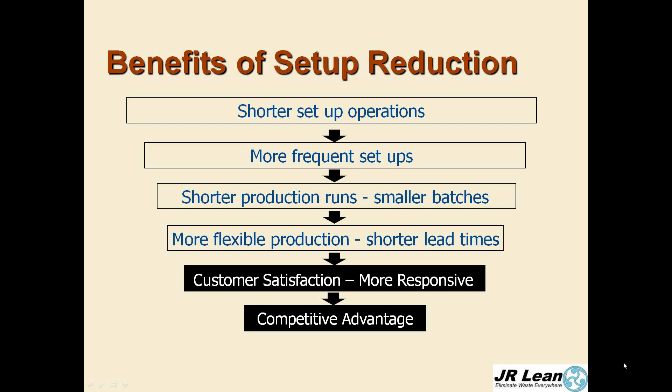So we watched the Formula One race car example, and I believe it was actually around 67 seconds that they took to change the four wheels and add more fuel in 1950. Now, it takes about 2 seconds. Back then, they had 4 assistants helping. And I think that was all they were allowed back then through the competition rules. Right now, 21 assistants.

But the labor is not where the cost is. The cost of your product is actually in how long it takes you to make it through the factory. So the value-added portion is extremely small of the time that it takes to make a product. So it's not labor that really adds cost. So what made the difference? Well, setup reduction or SMED.

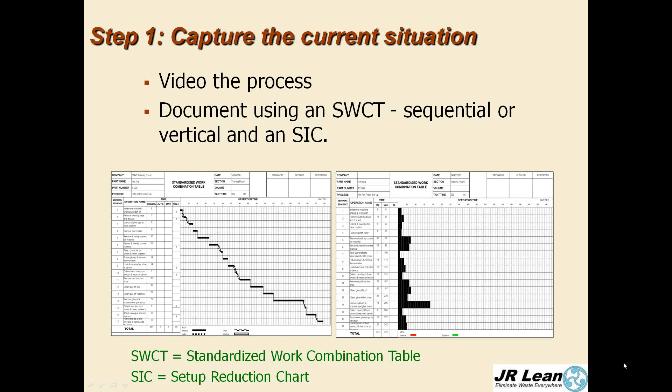And in this particular one, we're using like a Gantt chart methodology to show the elements. And in the other one, we're using a bar chart to show the elements. One actually shows like a Pareto, where's the longest. The other one shows the sequential and the duration. So capture the current situation. That's your first step.

Step two, you have to separate internal and external elements. So for each element, each line item that you have on your standardized work combination table, look at each one of them and agree whether that could be done while the machine is running, which is external, or whether it has to be done when the machine is stopped, which is internal.

So here are your descriptions. Internal, any work element which cannot be carried out safely unless the machine is stopped: tool changing, material alignment, etc. And external, any work element which can be safely carried out while the machine is running: preparation of tools, tool kitting, preparation of gauges, etc.

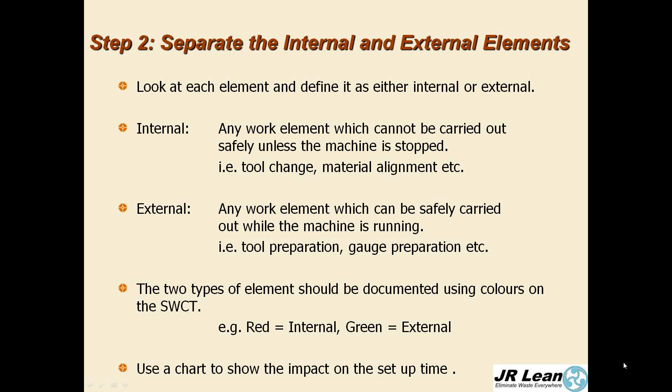The two types of element should be documented using colors. So red for internal and green for external. And then create a chart like we've seen to show the impact on setup time, such as this. So this one in the top left shows that there are quite a number of elements in there that are green that you can actually do while the machine is still running.

So at the bottom, we've just done a simple bar chart that shows the current state 100% stopped. And when we just look at separating internal from external, we see that 35% or 35 minutes out of 100 minutes can be converted to external. And that leaves you only 65 minutes of non-productive time. So this is step two.

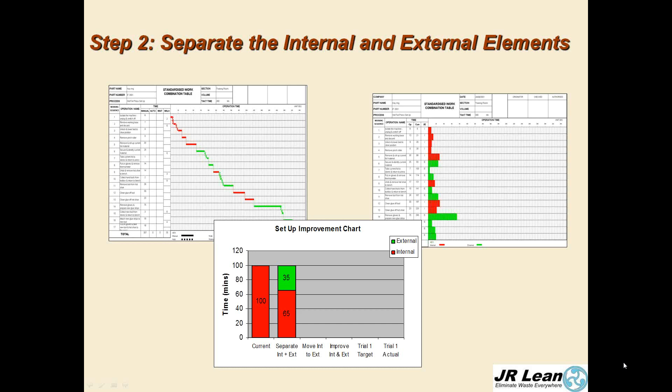Step three now is we want to move internal elements to external. So our focus now is looking at your internal elements and saying, what can we do differently that might make those as potentials for external? So we challenge the process. I've given you some examples here.

Presetting of tools offline. So you might go and purchase an optical presetter, and you can set your length and radius offsets to less than 1/1000th of an inch offline. You can preload the first part of a new batch already into a work holding fixture. You could add machine memory so that if you're running a computer numerical control machine, a CNC, you can actually download the next program while the current one is running.

If you're in a press, for instance, then usually a press has access from two sides, and you can then load the press from both sides. So you can pre-align the next tool that goes in there. And as you can see on the smaller chart over on the right, we took another 10 minutes out of the 65 minutes and converted those to external. So instead of 100 minutes being the changeover time or setup time, we've now only got 55 there.

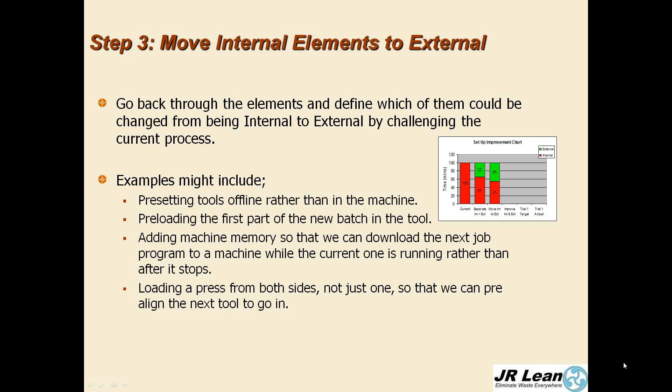Step 4 is to eliminate the waste from internal and external elements, because you really don't want to have waste in external either. Even though you do it while the machine is still running, it is still waste. So carry out a 7 waste exercise. Tim Wood, and all of you remember Tim Wood:

transportation, unnecessary inventory, motion that doesn't add value, waiting, overproduction, producing more or sooner than the customer demands, overprocessing, using the wrong set of tools, systems, or procedures, and defects. So remember Tim Wood, and then carry out that exercise on the setup process.

Obviously, you should focus firstly on internal elements, because they're just a waste of time completely. And some examples: standard pre-change kit lists and kitting trolleys, reduce the need for any hand tools that you might have, integrate into the equipment.

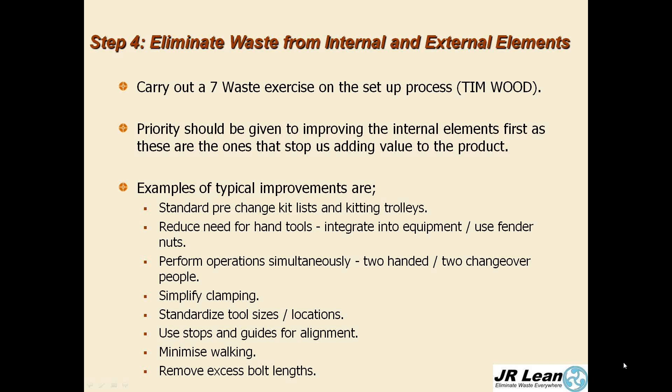So once you've completed the 4 steps, define your trial target. And then create a trial job detail and train the operator or the machinist to use it. So what do I mean by that? You've obviously converted a lot of internal elements to external. And now you've got a new process. You want to trial it to make sure that what you've agreed away from the machine actually will work. And this is the way to do it.

So trial it using the standardized work combination table, and then you can see from the targets what you get. And you can reduce and reduce. Once you've done that, it's really important to standardize your new process, and then to monitor the ongoing setup times.

Unfortunately, people, they're very simplistic. They will respond to what they're being measured on. Currently, if you don't measure changeovers, then they won't focus on making them quicker. If you do measure changeovers, then certainly there'll be a focus on making sure they're done to standard.

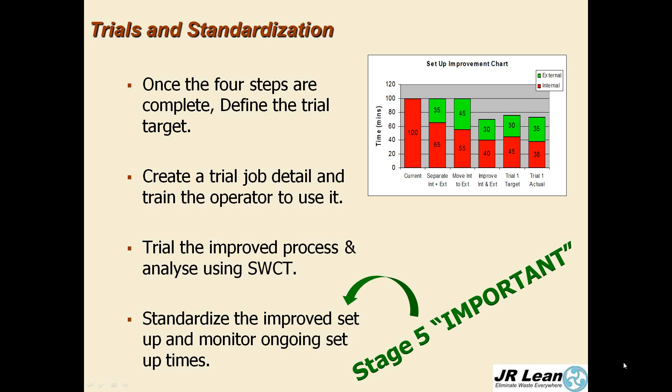And the team leads constantly rotated around the floor, and they could see when the setup started. They'd look at their watch, they could see what it is now. They would ask the machinist, how are you doing? And because the people knew they were being measured and monitored, they focused on reducing those setups really, really well. So it's very, very important to do that.

I'm going to show you a case study now. This is a company in the technology triangle, which is west of Toronto, Kitchener, Cambridge and Waterloo area. It is an automotive stamping company. They're a tier 2 supplier. And they did a value stream mapping exercise and determined that setup was a critical non-value added activity.

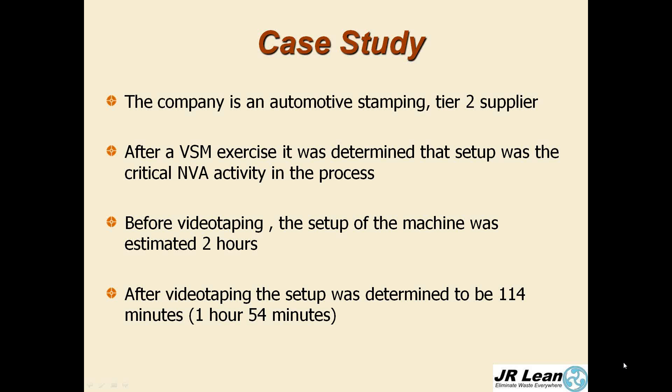Before they videoed the setup, they estimated that the changeover took about 2 hours. And when they finished the video, the setup then was determined to be 114 minutes, so 1 hour and 54 minutes. We did a 4-step process at this company on this machine, and I'm going to show you a video that will show you what the result was afterwards. Okay? Sit back and enjoy.

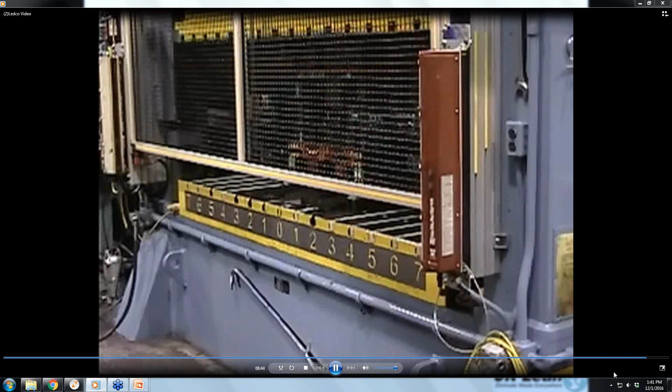So you can see from that video that, in fact, there was a lot of improvement made to that particular job. Previously, it was 114 minutes, and then it was 8+ minutes afterwards. What did the situation look like before we started doing setup reduction on the machine? I've got some images here that will help show what it's like.

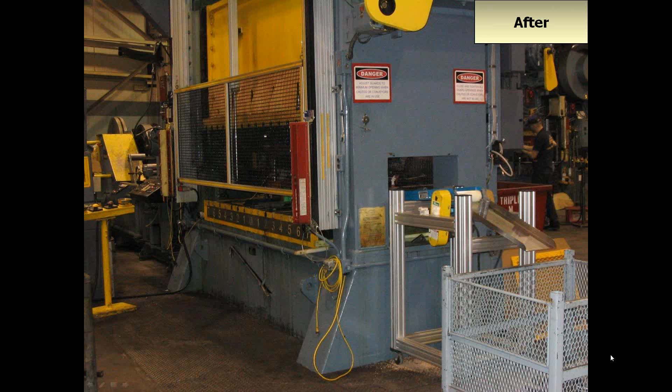Afterwards, they designed a really neat looking conveyor system that was on wheels, makes it mobile, and they could move it out and move it back in. Also, they numbered along the area, they numbered the bottom of the die where the table is, they numbered the slots. So that helped them as well.

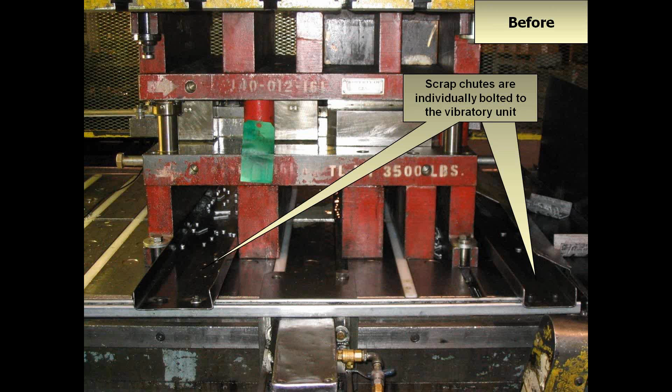Beforehand, they got the chutes that were bolted down to the vibratory unit. You can see the U channel at the bottom that they had, and there were bolts on there, and they had to obviously undo those bolts. And what did they do afterwards? They put a new vibratory unit on.

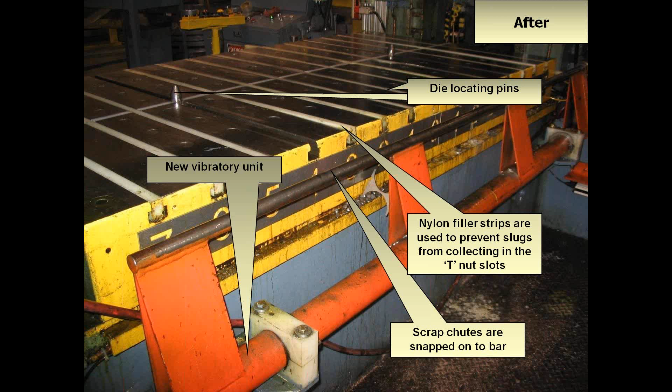They had die locating pins. They put nylon filler strips in the T-nut slots so that the slugs wouldn't go in there. And they had designed it so the scrap chutes could snap right onto the bar, just like that. So there was no bolting and unbolting of them at all.

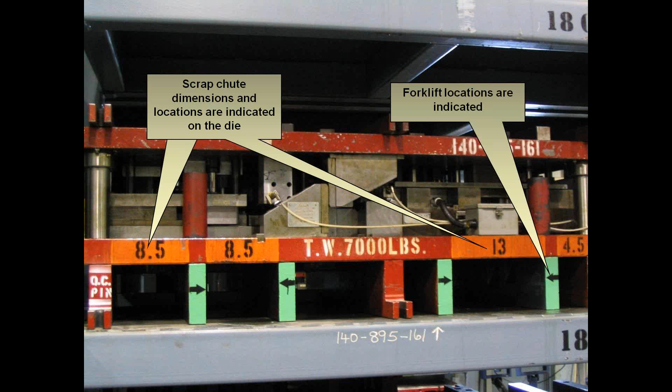They also dimensioned the dies. So these were the dies that they had, and it showed where the chutes went, the sizes. You can see the forklift locations are indicated where the green and the black arrows are, so the forklift driver knows where to pick it up from. And they did a lot of things to basically eliminate waste.

These were the recordings that they did back in November, I believe it was 2004. So it just showed you which shifts were doing which things. Day shift were doing pretty good. Afternoon shift were a little bit less good because they hadn't practiced as much doing the changeover.

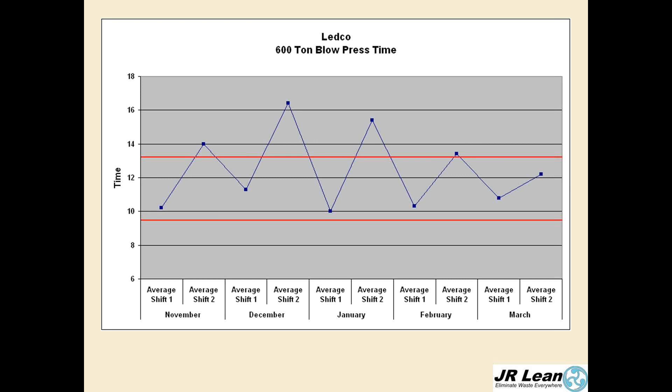These were the average times between shift 1 and shift 2. And as you can see, they got a trend of going pretty well down. So the second shift started to come into play February and March. So between essentially 9 and 13 minutes was their target for a changeover, as opposed to 114 minutes. So a huge, huge gain.

So let's have a poll question. Okay, so here's our poll question that we're going to ask you all. What does SMED stand for? Does it stand for Save My Engineering Department, Senior Management Embraces Dollars, Single Minute Exchange of Die, or September Means Endless Delays? Dave, can you bring up the poll question for the audience, please?

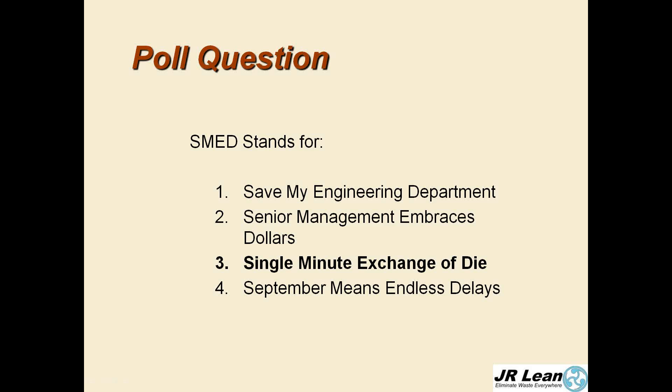Okay, I think everybody's had enough time. Let's see what the results are. Here's the answer, single minute exchange of die. And what did we get for the results? Dave? Can you show the results, please? 100%. Perfect. Excellent. Okay. It was a little bit easy one, but it really sinks into your mind.

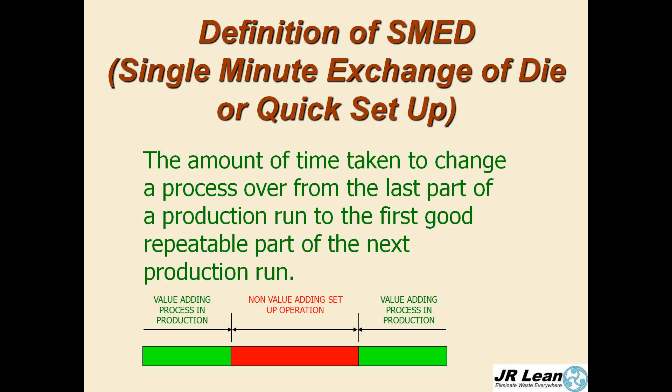So let's have a recap on SMED. What does it mean? Single minute exchange of die. And let's see, can you see my screen again, everyone? I think so, yes. So the amount of time taken to change a process over from the last part of a production run to the first good repeatable part of the next production run. That's the definition. How do we improve that time?

We perform a 4-step setup reduction activity. So step 1, capture the current situation. Years ago, we used to videotape. Now we just video. Step 2, separate your external from internal. So anything that can be done while the machine is still running, just separate it out. Step 3, convert any internal elements to external by ingenious methods, as you've seen on the video. And then step 4, go in even further to eliminate waste.

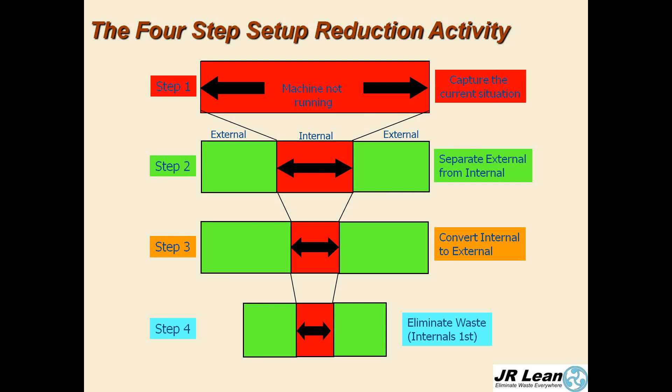And you noticed probably on the video they were using one size wrench, so all the bolts were standard and the wrench was right next to where they were going to use it. So they had one wrench either side of the machine. So a great example of setup reduction.

And obviously, once you've done those 4 stages, you've got to standardize and make it current. So that then becomes the norm, and you follow the PDCA continuous improvement process, plan, do, check, act or adjust, in order to get better. And that's what continuous improvement is all about.

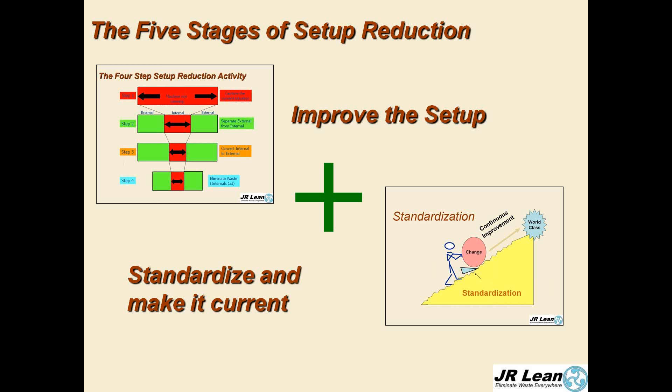So that concludes part 1 of today's webinar, which was on single minute exchange of die setup reduction. Part 2 is about pull systems. Let the customer pull. And if you do your SMED correctly, you can then afford to reduce your batch sizes, and obviously don't inundate yourself with double or triple the amount of work order paperwork to fill in. You can look at many ways of maybe going electronic and not creating a whole additional load of paperwork when you reduce your batch sizes and run many more batches per week.

So we say in Lean, every part, every day. Now, in order to control how those batches or one-piece flow goes through your system, we can introduce what's known as a pull system. So, what is push versus pull? Push, make all we can just in case, and pull, make what's needed when we need it. Wow.

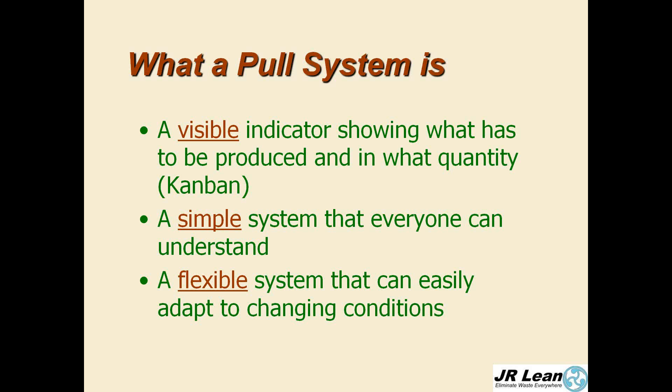What you really need to do is to say, okay, who are my downstream customers and what do they need next? And I'll produce that. And that essentially is what a pull system is. So it's a visible indicator showing what has to be produced and in what quantity. And we have a term there called Kanban. Next is a simple system that everyone can understand, and then also a flexible system that can easily adapt to changing conditions. So VisiFlex might be a good way of describing a pull system. It is not heavily computerized. It is not complicated. It is not based on sales forecast, and it's not run by office staff. It's run by the people who add the value, which are the ones that actually pay your wages.

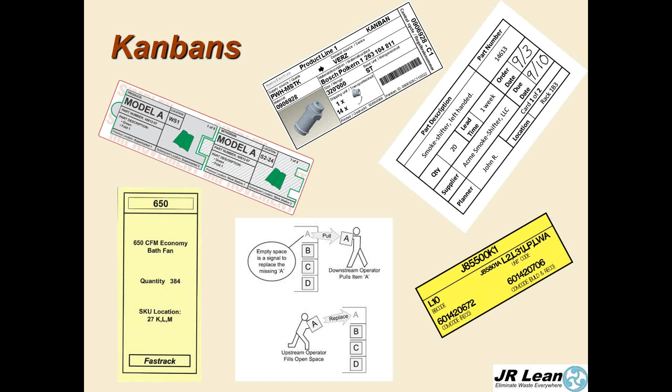So these are Kanbans, and a Kanban is just a visual signal. So it's a signal to do something. It's a signal either to withdraw something from a supermarket, which we talked a little bit about in webinar session 1. It could be a signal to produce something. So now you got a signal to make something. But it's a visible signal. And it's usually used in conjunction with replenishment of items when they're being pulled to deliver to the customer. So this is Toyota Corporation. They designed the Kanban, and essentially it's a material requirements planning technique developed by Toyota as a part of just-in-time inventory, in which work centers withdraw parts from feeding operations or supply bins. Kanban means a visible record, such as billboard, card, label, or sign in Japanese.

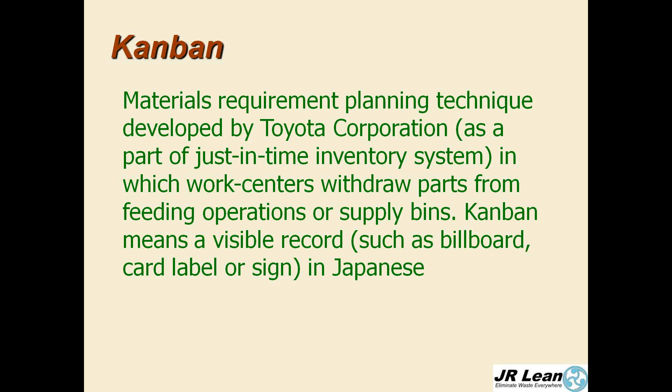Then there would be another signal that is sent to the stamp machine to replenish the 250 that has just been withdrawn, and then another signal sent to the steel supplier to replenish the coils that have just been used in the stamping machine.

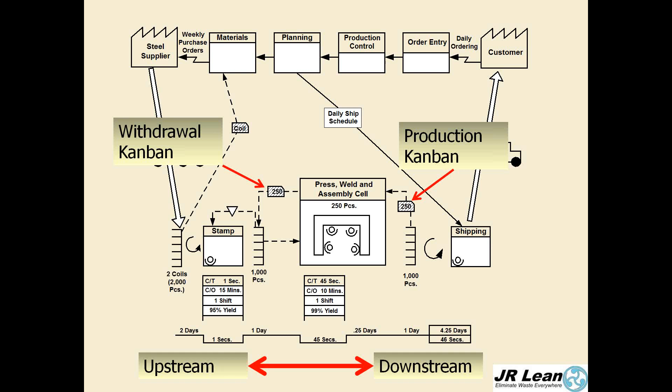So let's look at push versus pull. Pull is based on customer demand. Push based on sales forecast. Pull run by shop floor people. Push run by a computer, providing everybody's put the right data in.

Pull, making very small batches. Push, run by economic order quantity, according to standard costing. And if you haven't done your setup reduction, you're probably going to run big batches, and you're going to clog up your flow line. Pull is visible to all employees. Push is visible to a few employees.

So I've got a case study that I'd like to show you. It's a simulation. You're going to get this in the PDF handout later, but this will simulate how a pull system works. I'll give you a little bit of a background of this company.

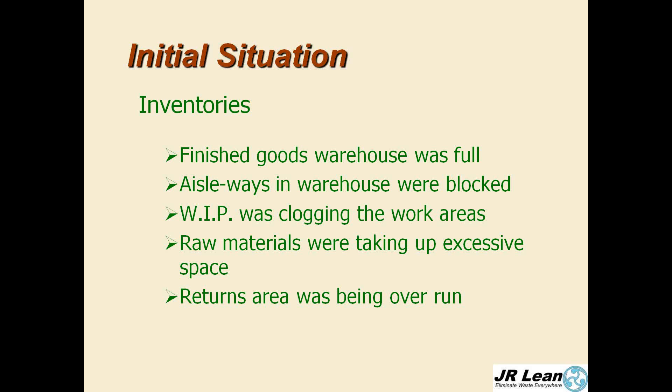The initial situation, their inventory was not very good. Their finished goods warehouse was full. The aisleways were blocked with extra inventory. Work in process was clogging up the work areas. The raw materials were taking up lots of space. And the return areas were being overrun. So not a nice situation to be in. Lots of opportunity, though.

Employees at this company. People were told what to do and when to do it. They were seldom asked what they thought about stuff. They were assigned to only one work area, and they were never involved in making any improvements. Again, great opportunity.

Customer service, their on-time delivery was below 80%. Their internal quality was 89. Their external quality was 97, because they had a huge amount of inspection and sorting going on. And the lead time through the plant was 3 weeks.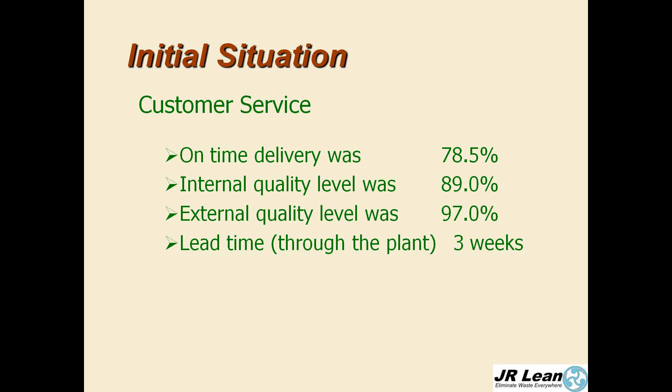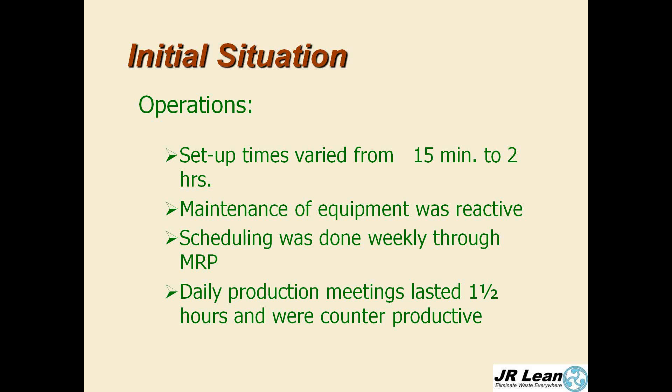In operations, the setup times varied from 15 minutes to 2 hours. Maintenance was very reactive and not proactive. Scheduling was done weekly through MRP, and the production meetings that happened every day lasted as long as this webinar. They were very counterproductive.

Declining dollar was increasing costs. Competition was getting tougher. Customers were becoming more demanding, and the US parent company made similar products, and margins were eroding. So remember that situation for the company, because we'll come to that again at the end.

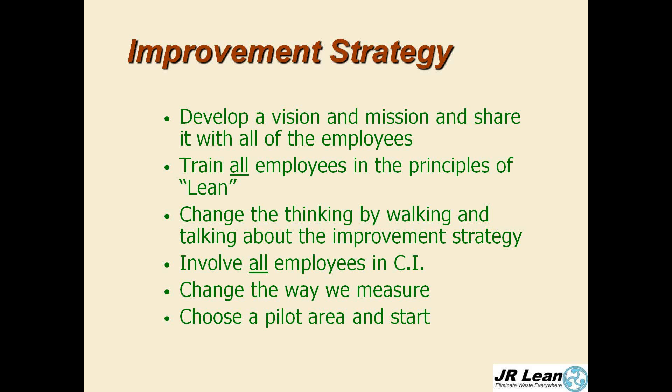So what was their strategy? So they, first of all, developed a vision and mission and shared it with all of the employees. They trained everyone in the principles of lean, and they changed the thinking. So the leaders changed the thinking by walking and talking about an improvement strategy. And then they involved all employees in continuous improvement. They changed the way they measured. And they chose a pilot area and then started.

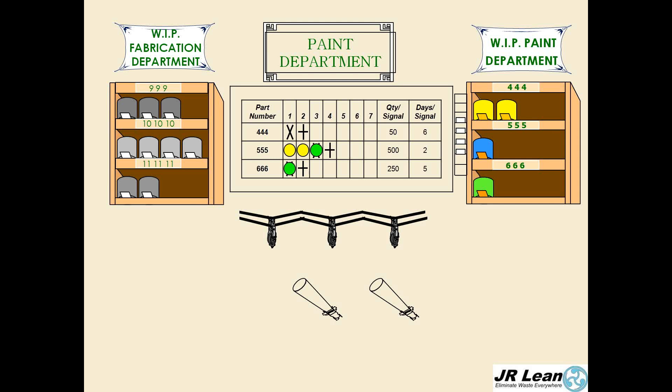As we progress upstream, the assembly line has been producing finished goods, so it's also been consuming WIP from the paint line. So the paint line pulls parts from fabrication, and the same rules apply to the paint line as they do to final assembly. So you prioritize based on customer demand. Now here, the 444 has again the number of days per signal, and you have 2 lots in there. So you've got 2 times 6 is 12 days worth of inventory in the downstream supermarket. The 555 has 4 lots of 2 days, so you have 8 days worth of inventory in the downstream supermarket.

And the 666 has 2 lots of triggers, and the days per signal for each lot is 5, so 2 times 5 is 10 days worth of inventory. So again, you would follow the same sequence. You would work on the lowest. So I've now got only 1 lot left, times 2 is 2. And on the 666, I've got 1 lot left times 5. So I manufacture the lowest part.

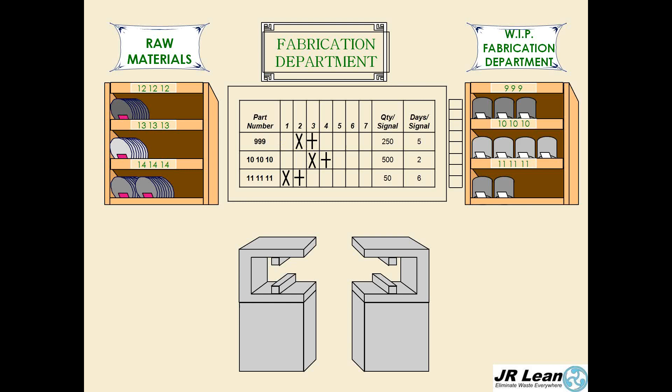And if you have setups that you haven't reduced yet, then you can be flexible and keep the same setup to produce the part, as long as you're not impacting delivery to your downstream process. And if you're impacting delivery, then obviously you have to work accordingly. So the process happens just the same. And this was the results of their inventory at this particular company.

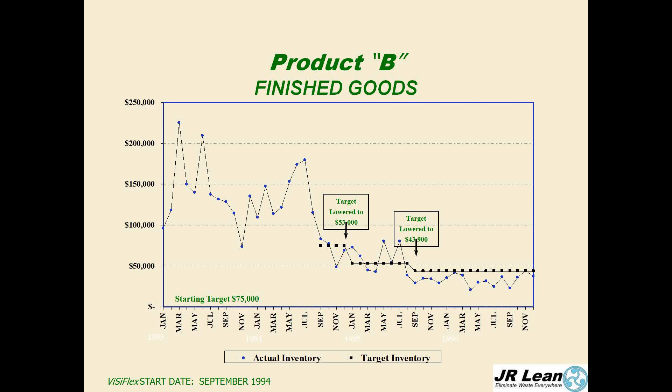This is product B, finished goods inventory, and this is one final assembly line, and it shows how the inventory was reduced over a period of time. So starting target was 75,000, and they actually achieved below there. And this was a long, long time ago, 1994. But don't reinvent the wheel. These systems work really well.

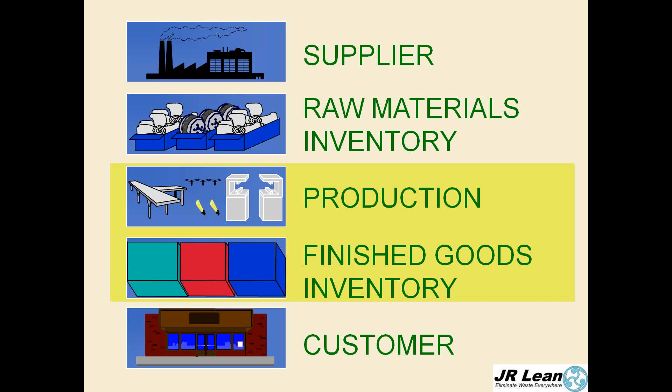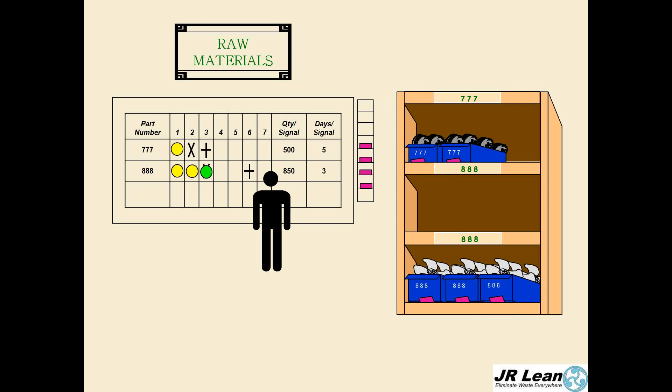So we look at the same sort of system and say, if it works for us, why can't it work for the supply chain? So here's the assembly line. We're taking parts and replenishing, and we need raw materials, so exactly the same format is used to determine the criteria for signaling replenishment. So purchasing is monitoring the boards constantly. And when a change is made to the board, they advise the supplier.

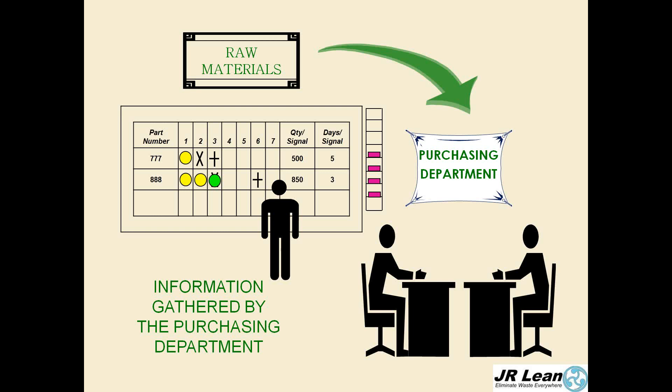So once they've advised the supplier, they use a signaling sheet, and this signaling sheet could either be an email to the supplier, or in some cases, it could be a visible Kanban. So there might be a webcam Kanban or a web ban.

I know of one company that actually has a complete supermarket that is covered by 8 webcams, and they have visible signals on that supermarket, and the suppliers who are bringing those parts into the company check the webcam every day through the internet, and they just supply a replenishment if it goes below the order level or the replenishment level. And then once a month they send an invoice in.

So there is no purchase order, there is no receiving advice, there's no packing slip, there's no matching documents, and once a quarter the company does a quick check to see how much they would have used over that 3-month period, and if it's within 5 to 7%, they just pay the invoice. An enormous amount of administrative chores that are eliminated.

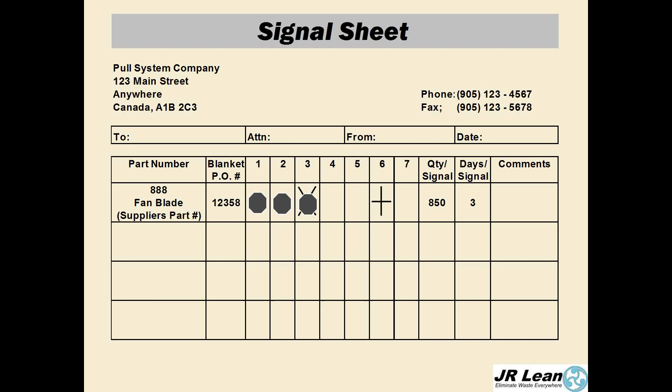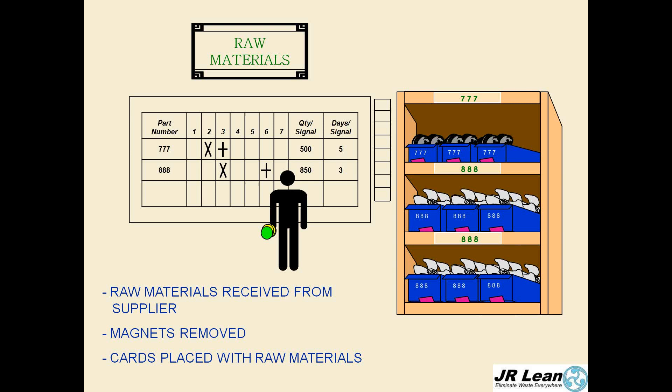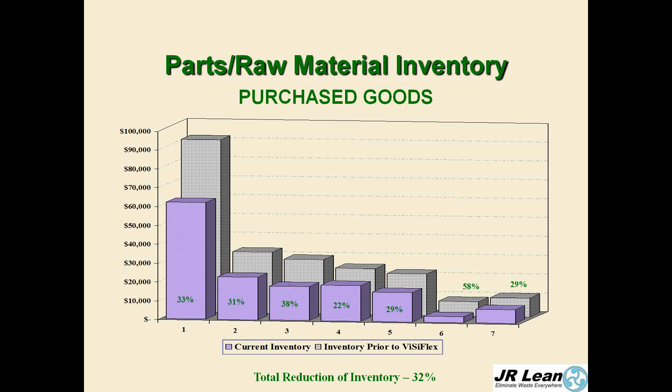So here's your signal sheet that gets sent to the supplier, and this is obviously multiple part numbers that go through, and it's sent by email to the supplier. The supplier then manufactures and delivers back to the plant, and all of the magnets are removed, and the cards are then placed with the goods back into the storage. So, inventory on purchase goods, again, we see a tremendous reduction from the current inventory prior to ViSiFlex down to the ViSiFlex system, 32% again.

So, the initial situation on inventories, finished goods warehouse was full. Now, 60% reduction. Aisleways in warehouse were blocked. Now they're cleared. WIP was clogging the work areas. Minimal WIP in the work area. Raw materials were taking up excessive space, reduced by 32%. Returns area being overrun, and it was now converted into an R&D area.

Employee involvement, people were told what to do and when to do it. Now people are coached to accept empowerment. They were seldom asked their opinion, and now they're involved in the changes. They were assigned to one work area, and now they're cross-trained. And they were never involved in making improvements, and now they're always involved in making improvements.

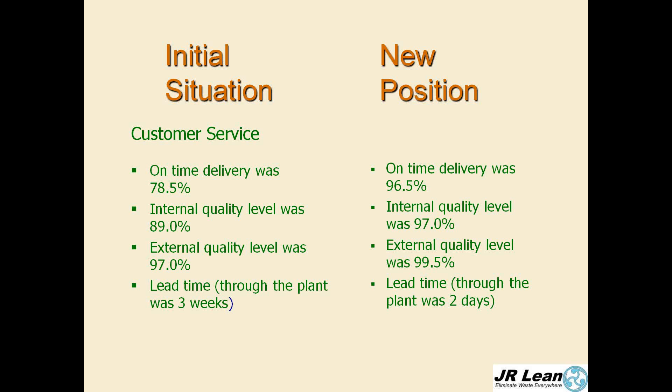Customer service, their on-time delivery was below 80, it's now 96.5. Internal quality, 89, now 97. External quality, 97, now 99.5. Lead time was 3 weeks, now it's 2 days. Incredible. Operations, setup times varied from 15 minutes to 2 hours, now 0 to 15.

Maintenance was reactive, now preventative maintenance on key equipment. Customer requirements met by scheduling, and now it's met by a pull system or Kanban, and the daily production meetings from 90 minutes down to half an hour, and are very proactive.

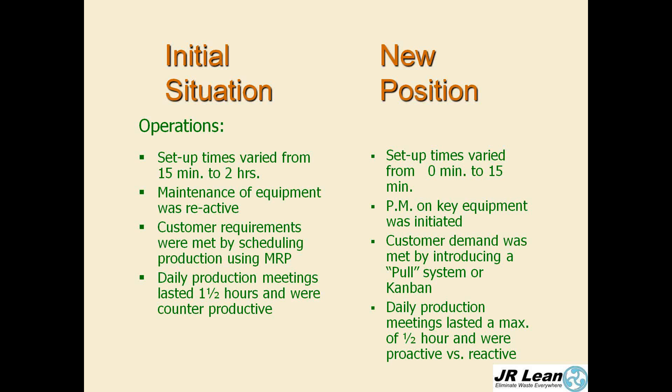Company, declining dollar was increasing costs, doesn't change. Competition was getting tougher, didn't change. Customers becoming more demanding, didn't change. US parent company made similar products, didn't change. Margins were eroding, margins are improving.

So, a poll question. A production Kanban is a traditional work order, or a card that is sent to production control, or a signal to production to start working, or a signal to upstream operation that more work is required. So, David, can you bring up the poll question, please? And we'll give everybody a few seconds to answer it. Is it 1? Is it 2? Is it 3? Is it 4? What is a production Kanban?

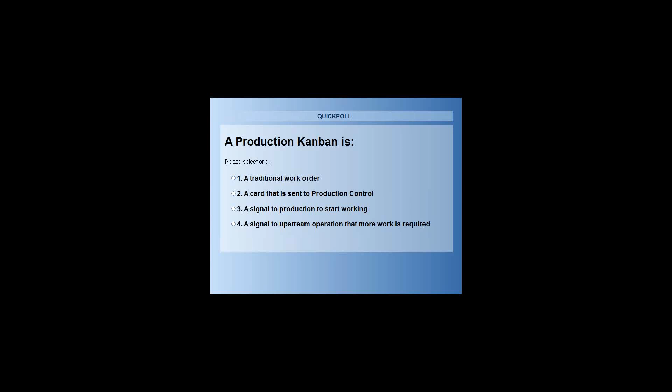All right, close that down. David, let's have a look at the answer. And the correct answer is a production Kanban is a signal to start working. So we had 55% said a signal to upstream operation that more work is required, 36% a signal to production to start working, and 9% a card that is sent to production control.

Okay, so that's interesting. So a production Kanban is a signal to start working. It's a signal to production to start working. I have to start working. So it's like those discs that are put onto the board. That is a signal to start producing. Okay, so I put that one in as a little bit of a teaser for you. A signal to an upstream operation, yeah, that is correct, but it may not be the right one for a production Kanban. So number 3 is the correct answer. Okay, thanks, Dave.

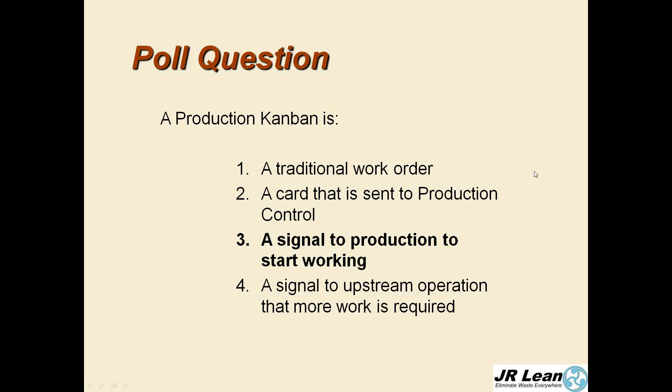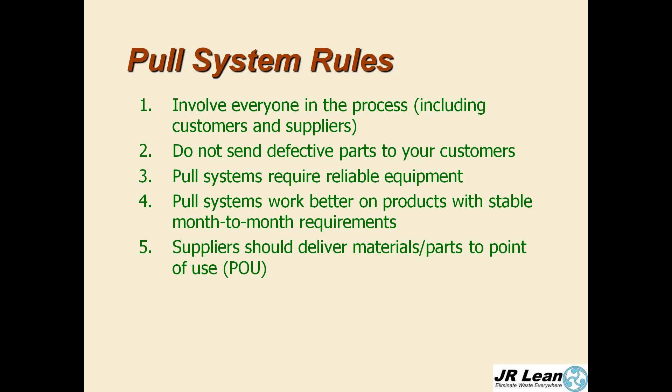All right, so let's have a look at some rules that we put in for a pull system. So number 1, include everyone in the process, both customers and suppliers. Don't send defective parts downstream. You should never do that. Pull systems require reliable equipment, stable processes, and they work better on products with stable month-to-month requirements. Suppliers should deliver materials or parts to point of use, and Kanbans should be returned to the supplier immediately.

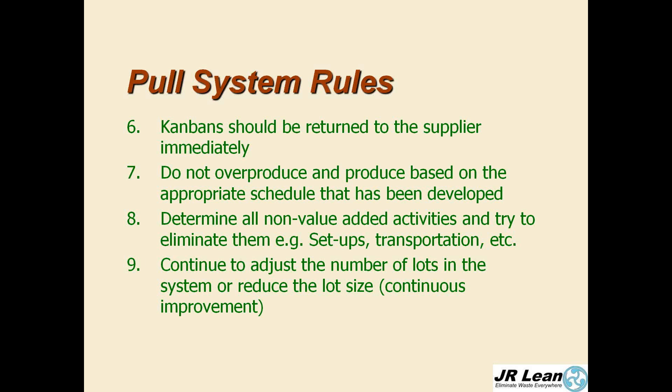Do not overproduce, and produce based on the appropriate schedule that has been developed. Determine all non-value added activities and try to eliminate them, i.e. setups or transportation. And then finally, continue to adjust the number of lots in the system or reduce the lot size. Continuous improvement.

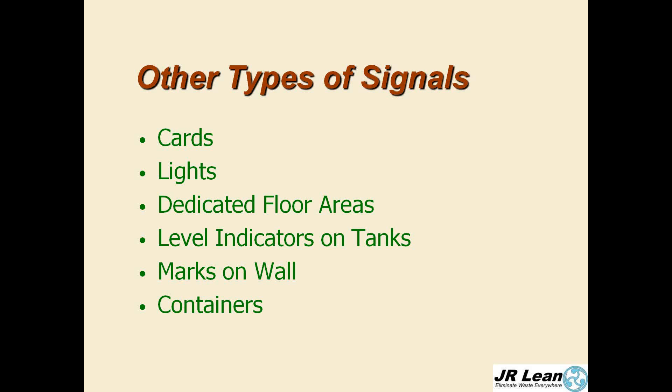Other types of signals that you might see besides cards: lights, dedicated floor areas. So if you've got 3 spots in front of a piece of equipment, if you've got an empty spot, that's your signal to produce. You might have level indicators on tanks, marks on walls, or on racks or containers, etc.

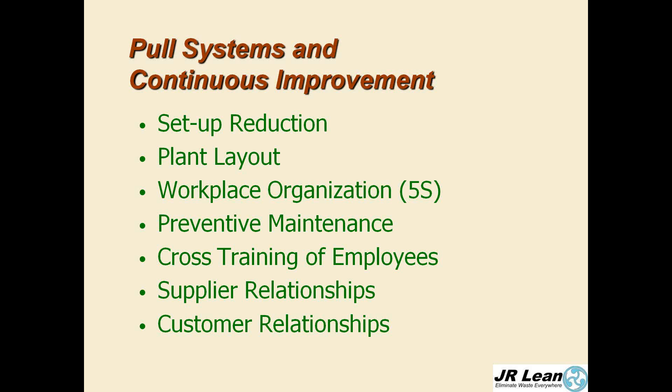So, any questions? We've looked at SMED today, and we've also looked at pull systems as well. So let's see if we've got any questions. David, any questions? Thank you, Richard. If you have any questions, please submit them on the right side of your screen.

Here's one, Richard. What if setup takes more than 1 shift? Would you still video it? Yes, absolutely. You've got to see it in its entirety in order to make sure that you capture all the elements. If you've got a whole shift dedicated to a setup, obviously it's a pretty complex setup. If you're going to reduce that, you have to make sure that you get all of the elements and identify them before you can then separate the external and internal, David.

Thank you. And one other question, do you have any examples of electronic Kanbans? I gave one already, which was like a webcam that a company uses, and that's a really powerful one. There are other examples. I've seen companies where at the supermarket within the pull system process, the operator or the machinist has the ability to go to a screen, and if he's pulled out a lot to produce in, say, a downstream process, he can immediately click a link or tap the screen. It will send a replenishment signal to a supplier to immediately come and replenish what he's just withdrawn.